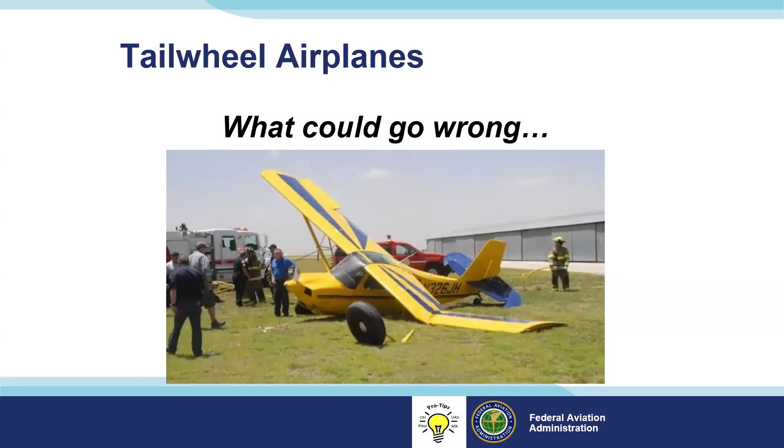So, okay, golden rules for tailwheel flying. Go ahead, Bob. And you can see right there, they're pretty simple. You have to use your feet as well as your hands, as well as your head. So use the rudder pedals.

In a tailwheel airplane, it wants to fly. It's at a good angle to fly. So you want to keep that stick back and keep the tail on the ground. And I come back to my favorite rules: keep it straight. Rule number 1, use the rudder pedals.

So this is something people don't think about too often, but where is the CG? Think about where the mains are located, and that'll give you a really good idea. If you're tracking straight, don't get too relaxed because you've got that big rudder back there. You've got the fuselage, and if the wind is not your friend that day, the only control you're going to have is via the rudder, because guess what? It's steering that little tail wheel. So stay with it. Don't let it get away from you. And if you're not straight, the CG wants to get ahead of the pivot point.

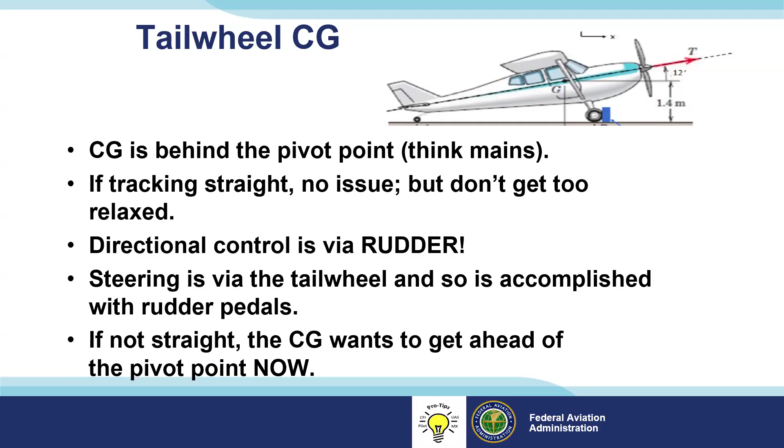Okay, so as Bob said, rule number 1 equals rule number 3: use the rudder. Here's a problem we run into frequently when individuals come here to get a tailwheel endorsement. This applies to anybody with 50 or 60 hours up through airline pilots with thousands of hours who come here to get a tailwheel endorsement.

Many of them have trained in aircraft where rudder usage is secondary to practically non-existent. The hardest thing we have to do is get them to wake their feet up and use the rudder pedals, to be able to feel and anticipate what the airplane is doing and what you need to do to correct it. We have one primary rule here: regardless of wind, you never stop flying a tailwheel airplane from the time the engine starts in front of the hangar until the engine stops in front of the hangar.

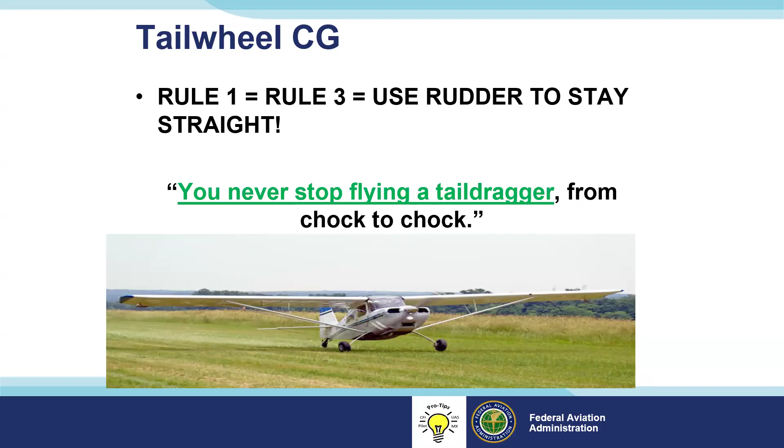So what about the brakes? We find this is a major problem, and as you can see, we teach it a little bit different. We only use the brakes for 3 primary functions: startup, run up, and possibly shutdown.

There is one other item. Sometimes on some of these airplanes, you do need to hit a little brake to break the tail wheel loose so you can make a tight turn. But overall, we want to keep your feet away from those brakes unless you're in one of those first 3 major points. When else might you need brakes? Well, a bad tail wheel.

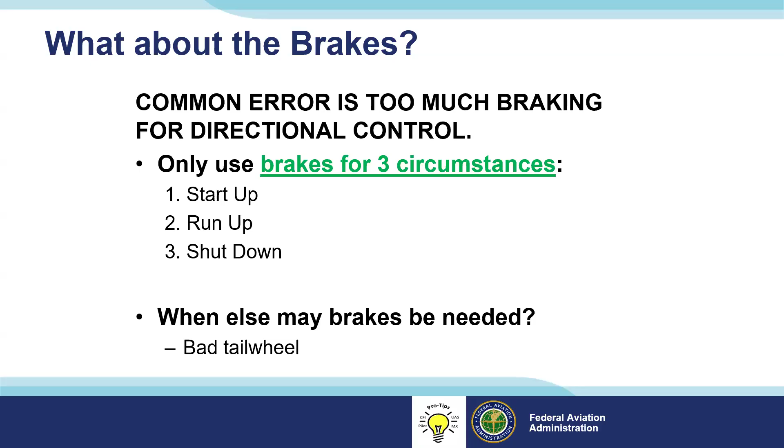The old style drum brakes, which we have on our Cubs here and the Champs, are pretty useless. The newer disc brakes are much superior as far as being able to slow that wheel from turning. So you have two problems: one, the old drum brake just doesn't want to work, and two, the newer disc brakes are just too good.

So once again, I go back to what I said originally: use the brakes for what they were intended, not to help you out. You've got the controls. Remember, stick back for best control and to avoid what's on that picture right there.

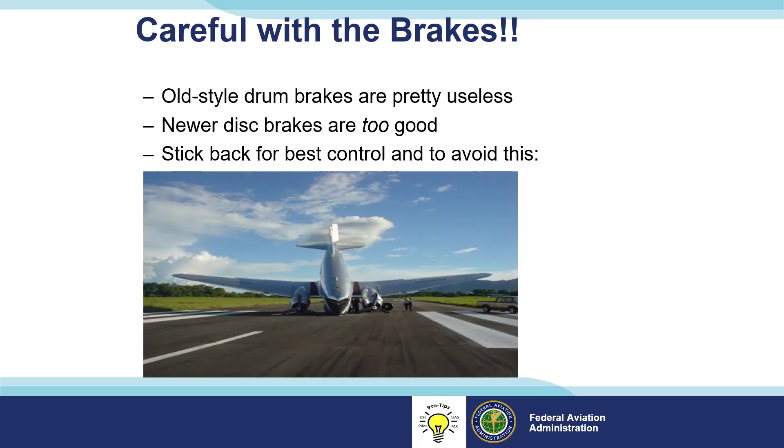One of the things I'd like to bring up is individuals that come to us, particularly if they've been flying tricycle gear airplanes up to this point. This reflects a lot on the instructors too - they've learned to taxi with about 2,000 RPMs and riding the brakes all the way to the runway. That doesn't work so good with a tailwheel airplane.

What we try to do here and insist on is that you need to be able to stay ahead of the airplane and feel the airplane so that you don't need brakes to get yourself out of trouble. Now that's a rule that doesn't always hold true.

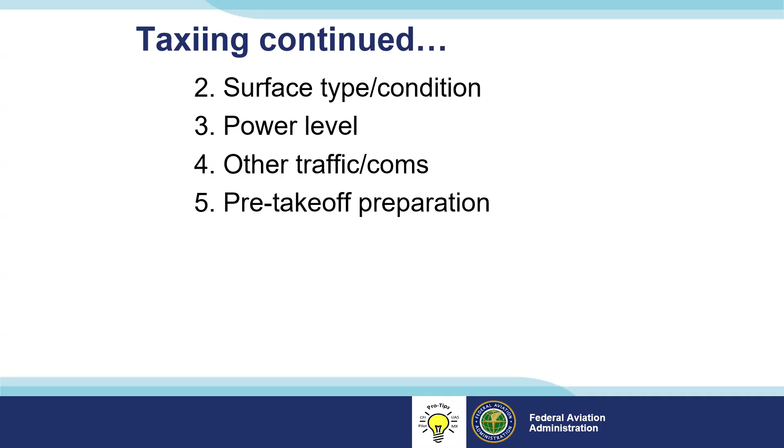Other takeoff factors we want to consider and teach are how to deal with the winds and the crosswinds, and what is the crosswind component for the airplane you're flying that day. On a 200-foot wide runway like we have, if you've got a good stiff crosswind, I'd like to teach a more advanced student that if you start on the very northeast corner of the runway and angle about 15 degrees to your right on a takeoff roll, you can lessen that crosswind component by sometimes 10 degrees and 10 knots, and be comfortably well within the crosswind limitations of your aircraft.

The other thing to consider is climb performance, and that's something we especially have had to deal with in the last 4 or 5 weeks - we've had unusually warm, humid weather, so aircraft performance is very important along with dealing with crosswinds. Maybe yesterday when it was 70 degrees, you were 200 feet above the water tower half a mile off the end of the runway. Today, with that crosswind and trying to keep it straight, and it's 91 degrees and 70% humidity, that water tower looks like it's getting real big in the windshield. So you need to take those kinds of things into consideration.

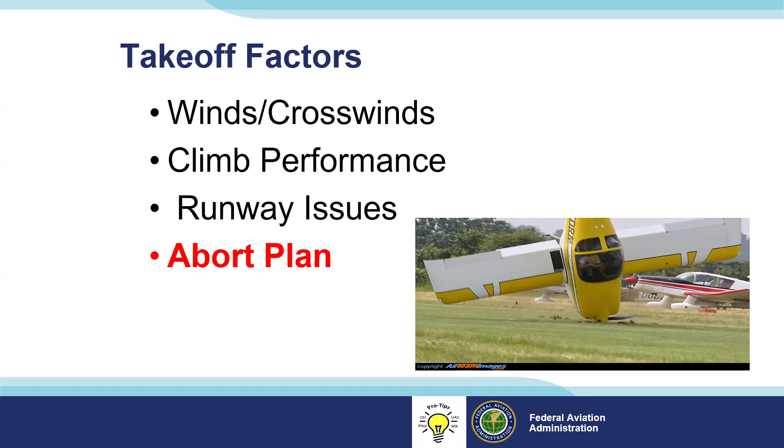Runway, as Bob mentioned earlier - are you taking off on hard surface? Is it a rough hard surface? Is it an old runway with lots of cracks and bumps in it, or a brand new resurfaced runway? Is it a turf runway, and if so, is it tall grass or short grass? Is it wet grass - are you operating off a turf runway that underwent a 2-inch rain at midnight the night before? So you want to take those things into consideration and have a plan to abort if needed.

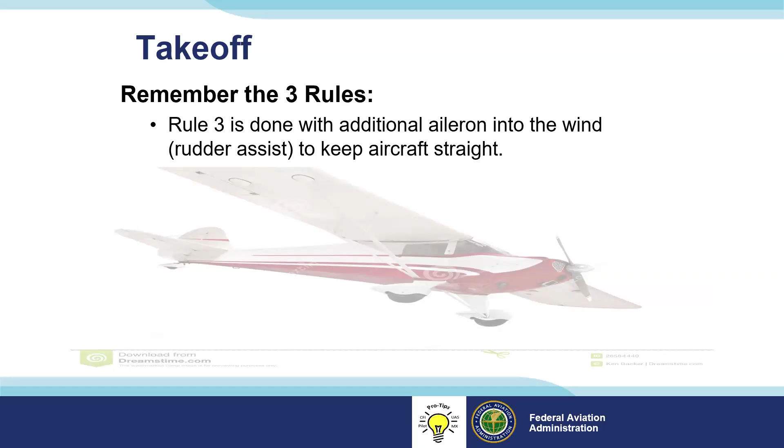So let's go back to our rules. The 3 rules were, and that could be a test, but in any case, this is the one we're looking at. Rule number 3: you want to keep it straight with the rudder, but you need to use additional aileron into whatever wind you might have out there to help keep that airplane straight. The wind comes up, or the wing comes up rather. You may not have enough rudder authority to stop it without doing that. And hence you might see some parts of the country you hadn't planned. So the 3 rules: keep it straight.

Okay, so here's what we like to do when we say we teach not only attitude flying, but develop a feel for the airplane you're flying.

All right, so we start with our step 1 on the takeoff. We start with the stick all the way back, and that's sometimes very hard for people to get used to. The reason being, from the time you add power until you're up to full power setting and have picked up some ground speed, your only directional control at that point is with that tiny little wheel in the back. So often I see people, when I start working with them, that have had a little bit of tailwheel time—the first thing they do is as fast as the power comes in, that stick comes forward.

Now, if you've got a crosswind, you're in about 5 seconds of no man's land there because the rudder is ineffective and that tail wheel is off the ground. So we see issues with that happening with some regularity.

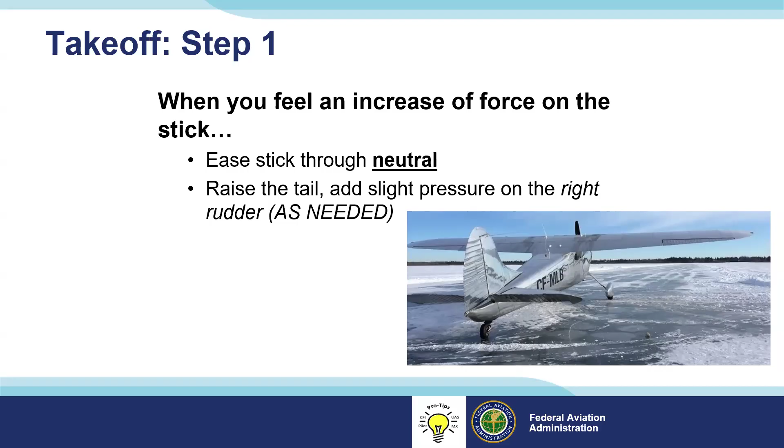So we start out with the stick all the way back, ease the power forward, and when you start to feel a little bit of a load on the elevator, you start to ease the stick forward to about the neutral position, not slamming it all the way forward. What we want to do is raise the tail, but raise the tail about a foot off of the ground, and that's all. Now you're in a very positive angle of attack, and you're using the rudder to keep it straight, and you continue to accelerate, and off we go.

That tail, with the tail low, you've got that positive angle of attack. So when that airplane is ready to fly, it flies. Don't bother to look at the airspeed indicator because that's inaccurate because of that angle anyway. So you feel the airplane, and it will treat you very well.

I want to add in on this particular point. We try to teach not a movement of the stick as much as a feel for the stick. Try to feel what you're doing with that airplane and let it try to talk back to you a little bit. We run into this all the time with people—when you tell them you've got to move the stick, well, it's either all or none. That doesn't work. And then if you tell them you've got to be a little bit more gentle with the stick, now they've gone the opposite way and it's too gentle and it's not accomplishing it. So really the only way you can do it is to feel the airplane.

It's what we teach here. It's called attitude flying, and it applies not only to your head, but to the airplane.

One mistake that individuals often make at this stage is because in a three-point attitude on most airplanes, you can't see over the nose. And a pilot, for some reason, they're used to sitting in a 172 and seeing over the nose. You get them in a tailwheel airplane and say, okay, you start out with stick back and ease it forward. The tail comes off, keep the tail low and keep it in that nice positive angle of attack and it'll fly right off. The first thing they want to do is push that stick forward so they can see over the nose. Now you're in a neutral, or in some cases with some airplanes, even a negative angle of attack.

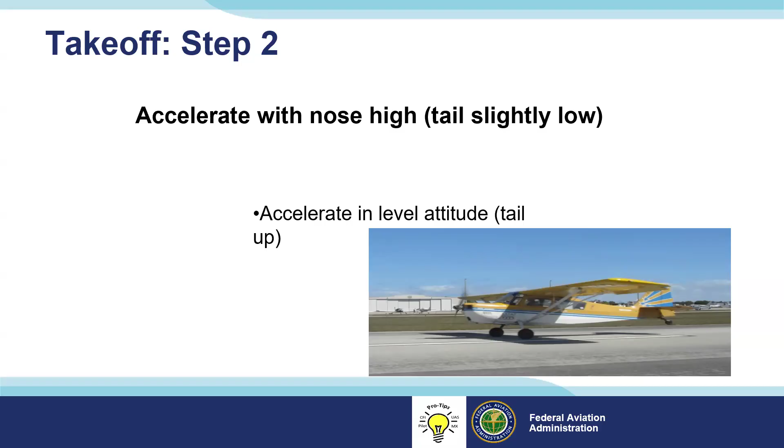And I'll tell them when we're taking off to the north here, if you're going to leave it in that attitude, we're going to be driving this thing on the ground all the way to Fond du Lac rather than flying. And Fond du Lac's 33 miles away. So you've got to do it smoothly and positively. It's very easy. Keep the tail low. The airplane will take care of itself and it'll fly when it's ready. You don't have to sit there and stare at a gauge or be herky-jerky on the stick.

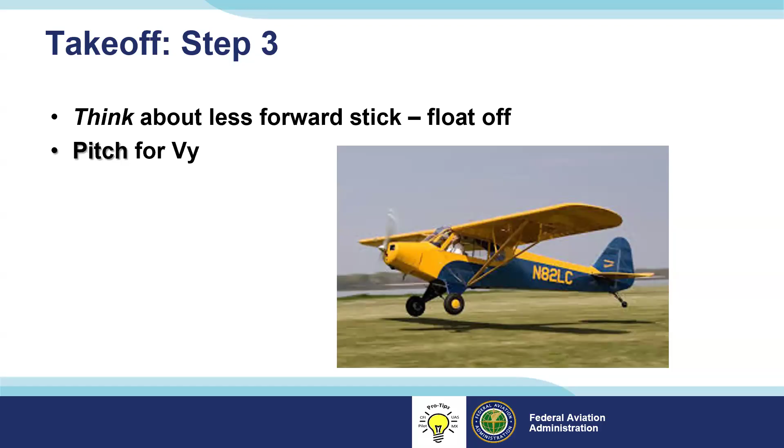I think Steve has covered that pretty well on this slide. Just think about moving the stick rather than physically pushing it an inch here or a quarter inch there. Just let the airplane do what it wants, and that's it. It wants to fly. Once you're off the ground, you can pitch up and get yourself in line with whatever comes next.

Everybody knows about P factor, but how many people think about if the airplane is on a three-point stance, what kind of P factor are we going to get when we put in that power? You're in a high angle of attack, which increases the P factor. Therefore, you're going to need to use that rudder. Again, what you need, no more and no less.

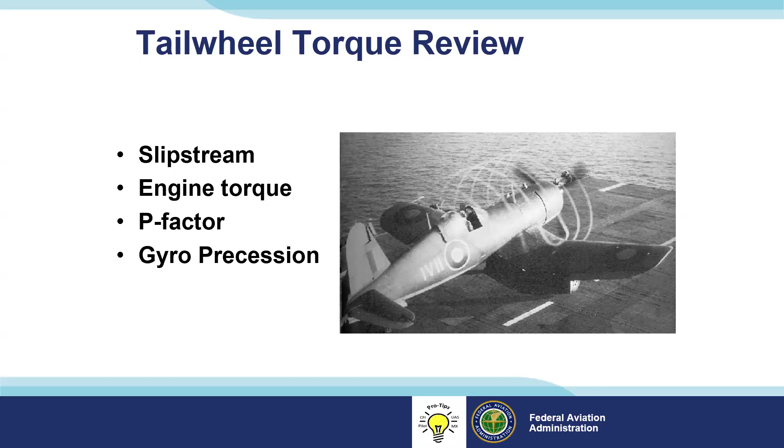Engine torque. The prop is turning to the right on American airplanes or American engines, and equal and opposite reaction. So there's another one. And then the gyroscopic precession. Yep, it applies to the airplane just as well as it does to the old gyro instruments.

Here's a little exercise that you can do, and it's one that we incorporate from time to time. It works very well. Take about a one-foot-long piece of yarn and tape it to the center lower spot on your windshield. If you are in a good coordinated flight attitude, that string will be nice and straight. If you're skidding or slipping or yawing, or in an uncoordinated setup, that string is going to tell you right away that you are not coordinated.

You don't see this very often on airplanes. You see it all the time on gliders, for those of you that may have had something to do with getting some glider time or what have you. They do it frequently there. But if you, as an instructor, have a student that's having a hard time feeling the airplane, this string idea will really help.

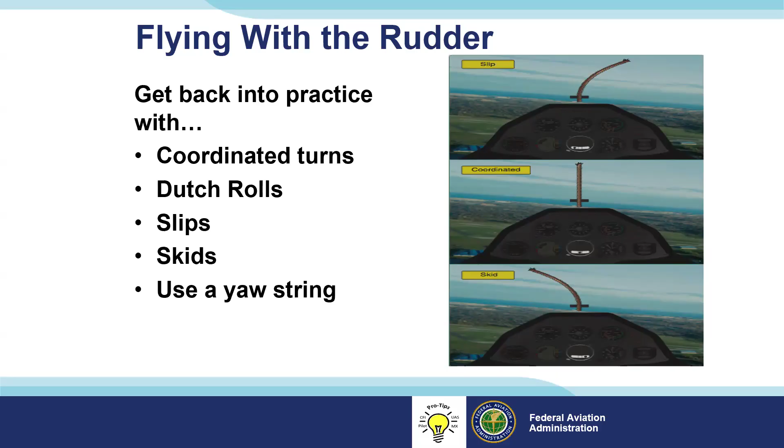The other thing that we really like to do to help a student develop a feel for the coordinated inputs of aileron and rudder is the maneuver called the Dutch roll. That is nothing more than rotating the airplane about the longitudinal axis, about a 20 to 30 degree bank left, followed by a 20 to 30 degree bank right, while keeping the nose pointed at an exact spot on the horizon.

This is one of my favorites, the stabilized approach. We're big on that because, especially with tailwheel, if it's not stabilized, the end result may not be what you're expecting. So what is a stabilized approach? You have to go back and ask yourself, what controls airspeed and what controls altitude? We call it pitch, power, and airspeed.

We teach a stable approach in that the basic airfoil is going to be in the best glide attitude. On these high wings, most high wing tailwheel aircraft, the bottom of the wing is going to be just about parallel to the horizon. That's going to give you a very close approximation of the best glide. Having said that, that leaves only the power left to maintain your altitude. So if you're a little bit low, you're going to add a little bit of power. If you're a little bit high, you're going to take a little bit of power off. This is going to go right back to the feel for the airplane and energy management.

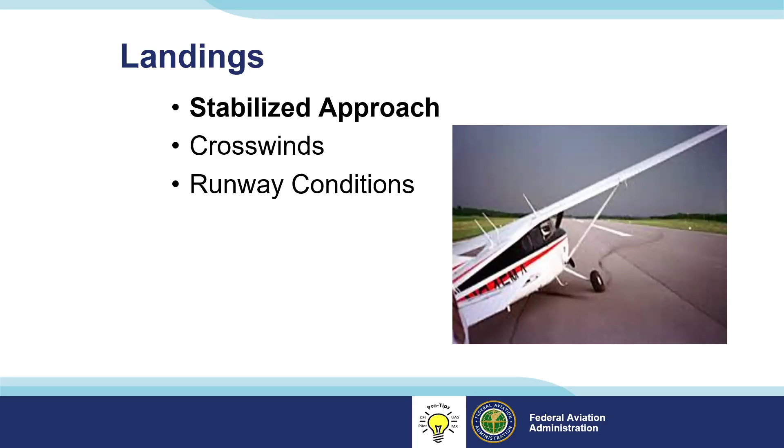So if you're in a crab or a slip approach, you're going to end up having to change it anyways. Here, with the crab approach, you only have to do it once.

Two types of landings that we do in teaching tailwheels: there's a 3-point or full stall landing, and then there's also the wheel landing.

In the 3-point landing, we teach the approach this way: you've been flying a 152 or 172, so think in terms of how you handle a soft field landing in a 172. We're going to come in with a stabilized approach, and then as you reach about that 10-foot point off the ground, you apply back pressure to level off and reduce that rate of descent. In a tailwheel airplane, you're going to make an eye transition and not be looking over the nose anymore, but about 30 degrees to the left and right.

Now you can sense the airplane starting to settle, and we want to play that game of trying to hold it off as long as we can. For every foot we go down, we want to add a little more back pressure and slow that rate of descent down, so that if you make the perfect 3-point landing, it would be a zero descent, zero flight speed. Once on the ground, this is where we run into big issues with tricycle gear people.

They're so used to, once on the ground, just letting go of the control stick or control column and letting it roll out. Well, that's where you get into big, big trouble in a tailwheel airplane. You keep that stick back. The reason for that is it keeps the air flowing over the elevator, which helps keep that tail on the ground. And now at that speed, those wings are in a stalled configuration.

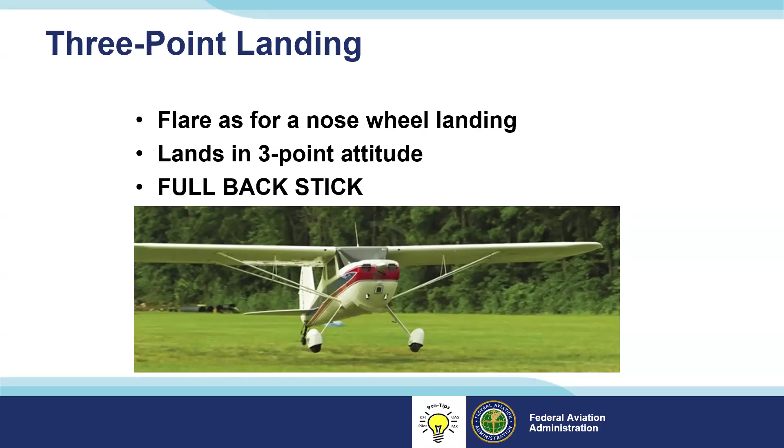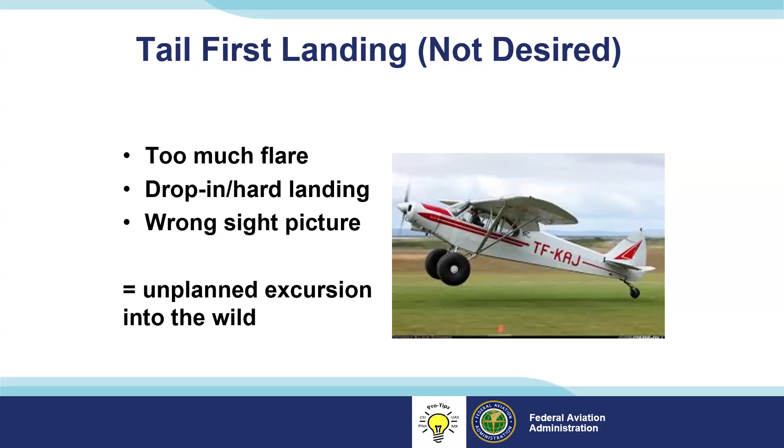Some of the mistakes we've seen here - when you tell students they have to level off and flare, they don't look off to the side. They try to keep looking over the nose. Once you've entered your flare, you've lost sight of the runway, and now you have no idea if you're 3 feet or 10 feet off the runway. That leads to dropping in or a very hard landing, all as a result of the wrong sight picture. And as it says at the bottom, this can sometimes lead to a very interesting ride through the tulies.

The wheel landing is just a little bit different because your attitude is going to be different. You're going to be just slightly faster than with the 3-point. You'll be in a low pass attitude, level or tail very slightly down. And you're going to use the throttle to control the descent, the stick for the speed.

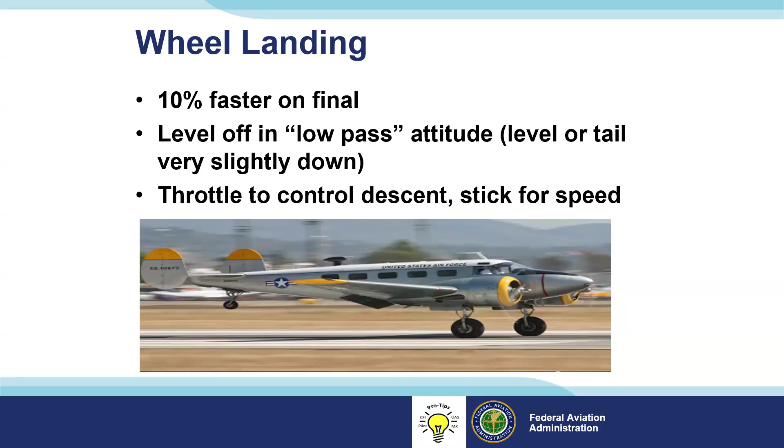So once the wheels touch down, you're going to think about a slight forward pressure. I will not tell you that you have to move the stick - I want you to think about it. Otherwise, the tail's liable to come down, that brings the nose up and increases the angle of attack, and guess what? You're up and moving again.

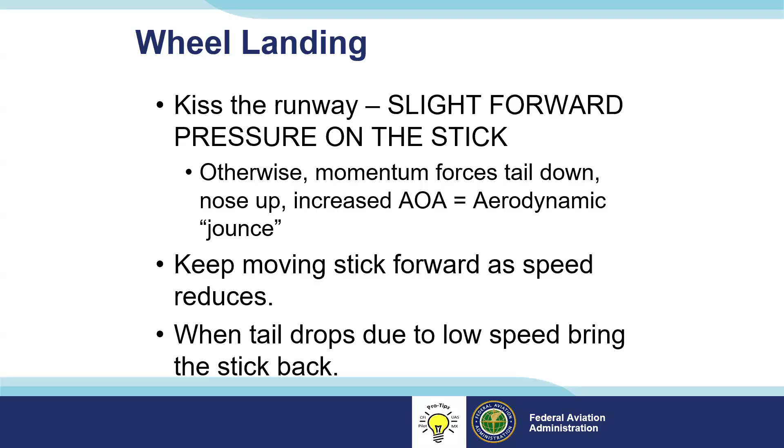As the airplane slows on the ground, you want to relax your pressure on that stick, just letting it go more toward a neutral position. When it finally gets to the point where that tail surface cannot keep the tail up, it's going to bring it down gently, and now you can work that stick back. This is a common error at that point in the wheel landing - they lose patience. Again, we're talking about feel. Fly the airplane, pressure that stick back, and you've got to end up with the stick all the way back to keep the tailwheel down.

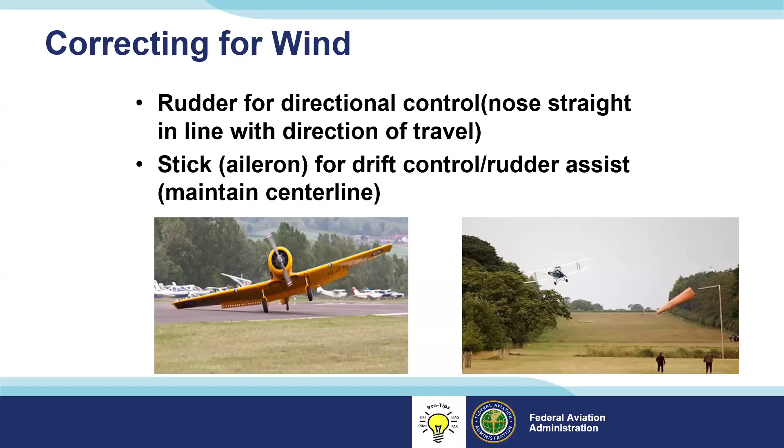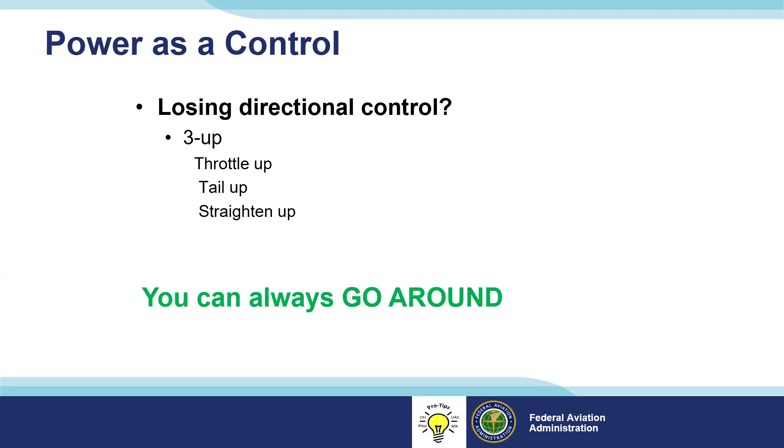So losing directional control - we like to teach what's listed there as the 3 up: throttle up, tail up, and straighten up. That puts you in a prime position to just go around. Once again, it's not necessarily physically moving the stick from one end to the other - it's pressure. Let the airplane tell you what it needs for what you want it to do.

Finally, some of the things we preach here: number one, to keep truly proficient, you can't be proficient if you only go out there and fly once every 4 to 6 weeks. We've discussed this among ourselves, whether it's Bob and myself who have flown thousands of hours, or individuals with only a couple hundred hours. I can tell it in myself - if I haven't been in an airplane for 3 or 4 weeks and I go out to fly, I can tell I'm a little bit rusty. What I like to do is go out and do some steep turns, a little slow flight, a couple stalls, and man, I've got it back again.

And the other thing is personal minimums. We teach that and work on it very hard here with students, but I'm concerned that many of you out there have forgotten all about personal minimums, and what are the conditions that are go and no-go for you, or what are you comfortable with? If you're only comfortable on Sunday mornings when the sun is up and it's dead calm, so be it. But maybe you need to find an instructor and practice a little on some crosswinds midday and expand those minimums a bit. It all depends on the type of flying you do. But I like to work with individuals to expand their minimums, not because they have to, but I always use this example.

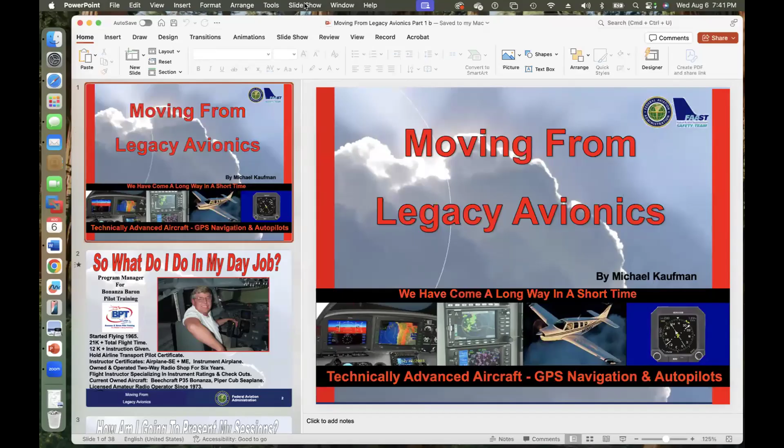Okay, very good. Bob and Steve, I was weaned in a tailwheel airplane and got about 7,500 hours in it. One of the biggest things about tailwheel airplanes is currency, currency, currency. My topic for this evening is moving from legacy avionics. It depends on when you were born as to what's legacy avionics—for me it's super homers and omnigators. That takes me back a while in the number of years I've been flying.

Moving on to the next slide, to give you an idea of what I do—I'm the program manager for the Bonanza Baron Pilot Training Program. I was an instructor with the program before becoming manager. The best part is getting the chance to fly with people. I started flying in '65, have over 21,000 hours, 12,000 in instruction, and over 7,000 in tailwheels. I have an airline transport pilot certificate and instructor ratings. I also owned and operated a two-way radio shop for 6 years for police and fire, so I'm kind of a geek when it comes to avionics. Right now I'm specializing in instrument ratings and checkouts. I have a P-35 Bonanza and a Piper Cub seaplane, and I'm also a ham radio operator.

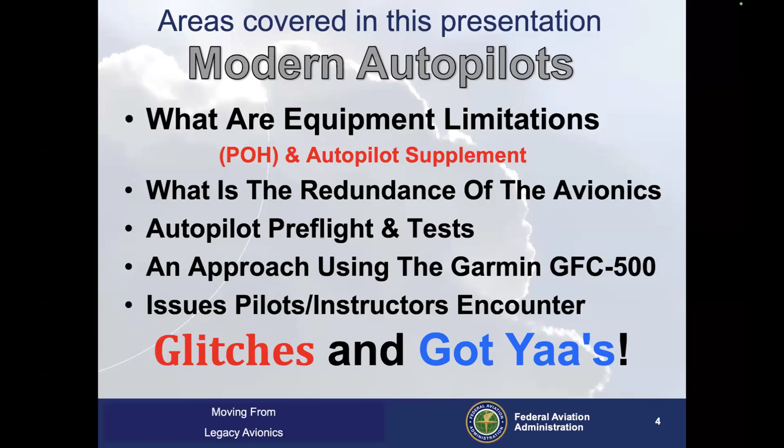We're also going to cover some issues that pilots and instructors encounter, and those are the items that I actually call the glitches and the gotchas. After the presentation is over, hopefully you can sort out the difference between a glitch and a gotcha.

Because of the time constraint here, I'm not going to be able to cover everything that I'd like to cover, so there's going to be some items I'm not going to be covering. One of them I'll mention is autopilot emergencies. I will touch a little bit on partial panel approaches. There's just so much to this modern avionics that there's just not going to be the time limit that we're trying to stay within.

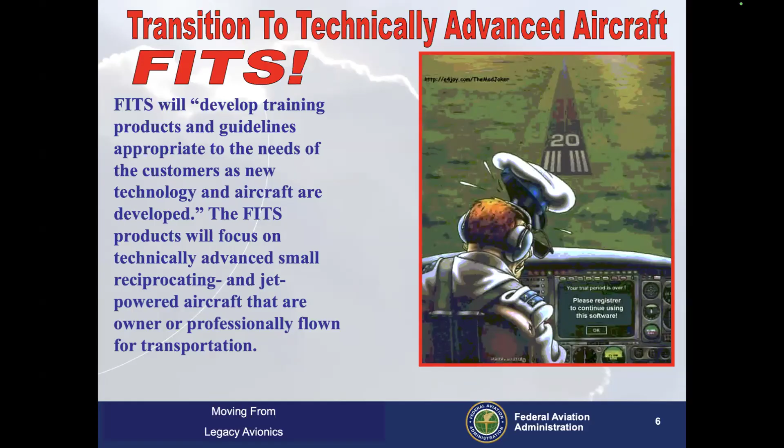Technically advanced airplanes—one of the things we're going to be using is the FITS training program, which is an industry program that works with the FAA and with pilots to go ahead and try to train others. One of the things you never want to see is your avionics letting you down just at the wrong time.

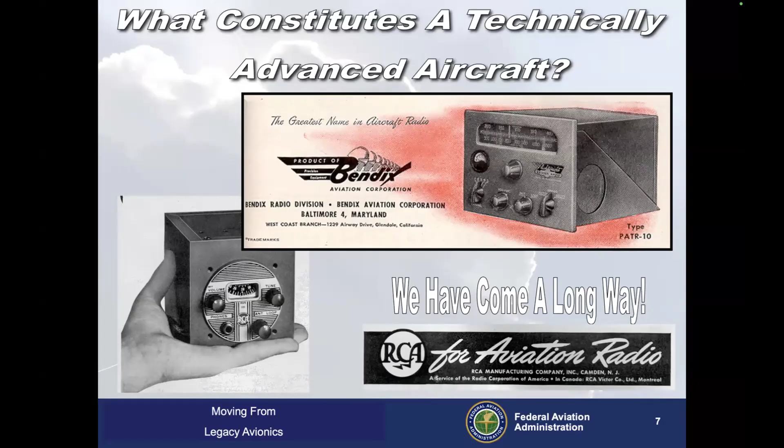Technically advanced aircraft, technically advanced avionics. This is a clip from a flying magazine in the 1940s. Early on, there was a corporation formed called ARINC. Prior to 1950, aircraft transmitted, received, and operated on frequencies between 3 and 6 megahertz—a whole lot different than the frequencies we're using today. Boy, yes, we have really come a long way—the technology that we need in order to go ahead and fly the airplanes.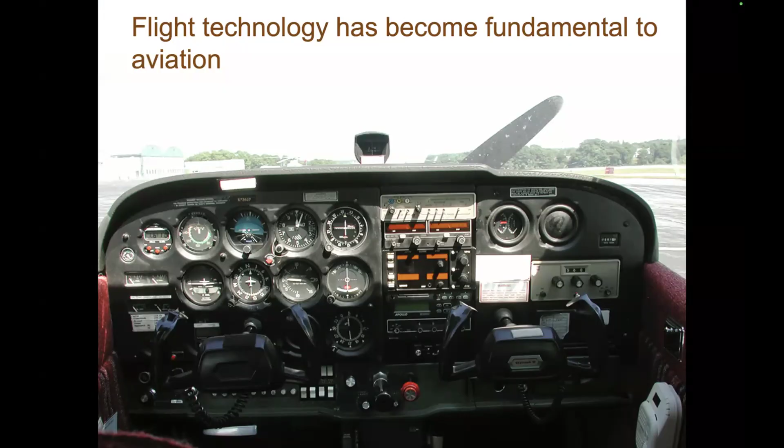You look at this type of panel, and for some of you, you probably look at this and say, hey, this is a fairly modern panel here. Of course, you look over at the right-hand side and you see that Cessna 480F in there, and you say, well, this panel has been around for a while, and a lot of people are doing panel upgrades. Then, of course, our panels come out looking something like this, hopefully—and also you're probably $100,000 poorer on your budget.

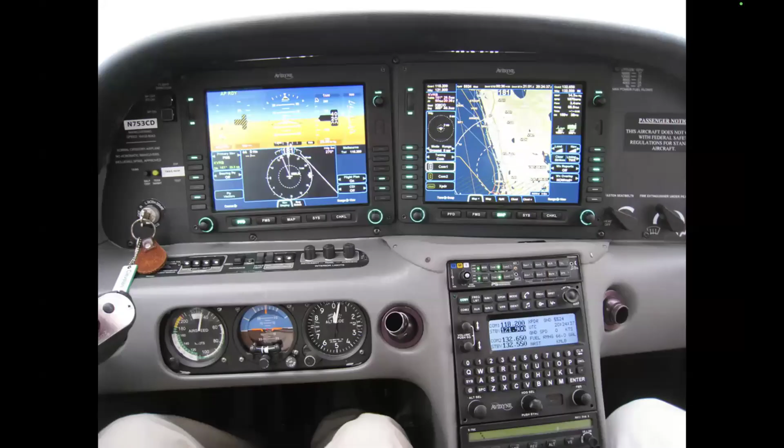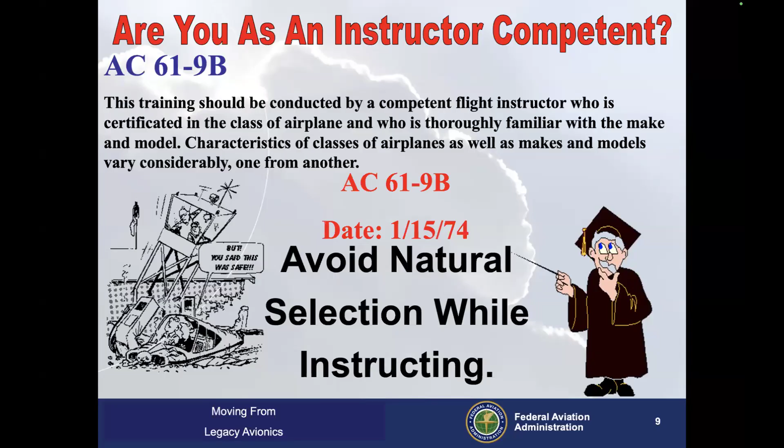I remember many cases there—by the way, you could have a Beech Bonanza that has 7 fuel tanks. So how do you get the fuel from the tank to the engine? Well, now we have to start going ahead and not being just competent on the airplane itself, but we also have to be competent on the avionics suite.

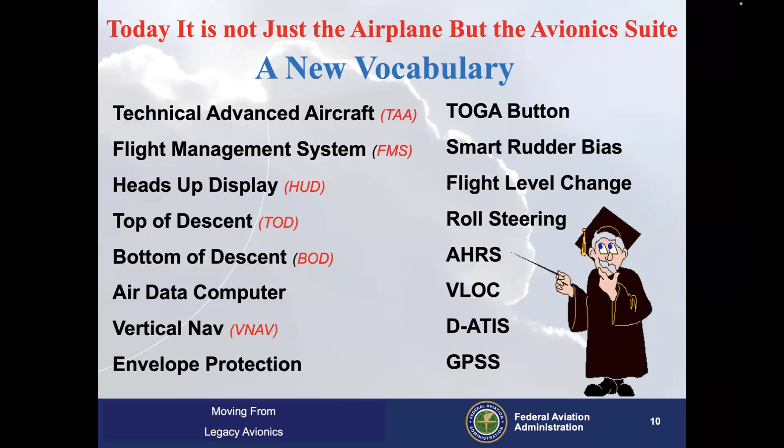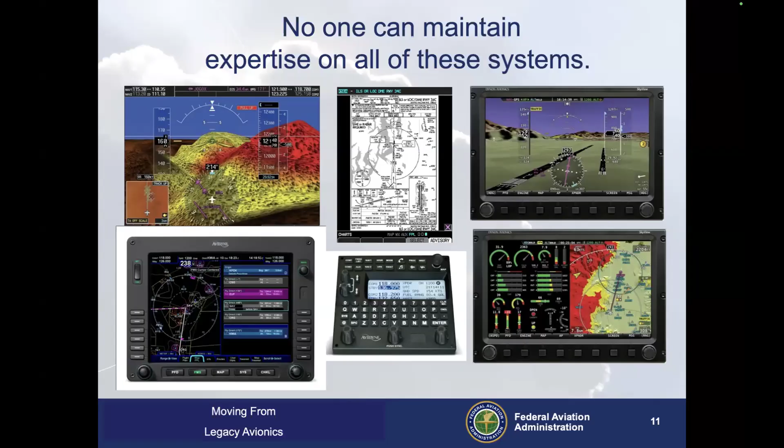Nobody can maintain expertise on all of these different systems that are out there. Everyone is a little bit different. Hopefully, in most cases, there's some standards that have been put together. I mentioned ARINC early on, and they actually have what they refer to as an ARINC bus, I think it's 429, which allows these different boxes here to go ahead and communicate with one another.

Connecting the practices that you know with the technology that you're going to encounter. This is really very important. Don't go ahead and give up on the things that you had been doing all these years. In other words, we use certain acronyms, we do certain things in certain places. For example, on glide slope intercept, we run through the GUMP checklist and make sure that we've got the landing gear down and the airplane is configured for landing. These are the same practices that you can continue on, whether you're using the new technology or dealing with some new equipment that you have in the airplane.

This is something really brought forward. The National Transportation Safety Board went ahead and said that our glass panel equipped airplanes are not safer than those equipped with the conventional steam gauges. They did an accident study, and the study was conducted from 2002 to 2006, when we first started seeing a lot of these changes in the avionics.

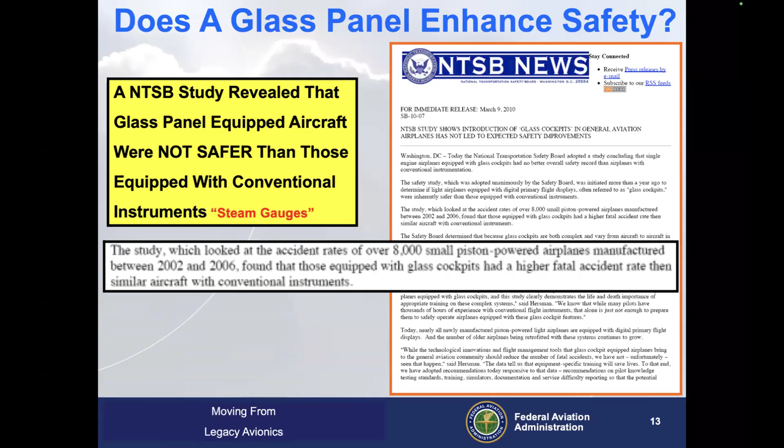There's some other things that they went ahead and suggested. They suggested pilots not familiar with the unique features of the glass cockpits were the leading cause of higher accident rates. This has really been true across the board, and there's several reasons for that. However, the purpose of this seminar is to go ahead and reduce airplane accidents. So this is what the safety board suggested: appropriate training on these complex systems is the only way that we can go ahead and make these glass cockpits safer.

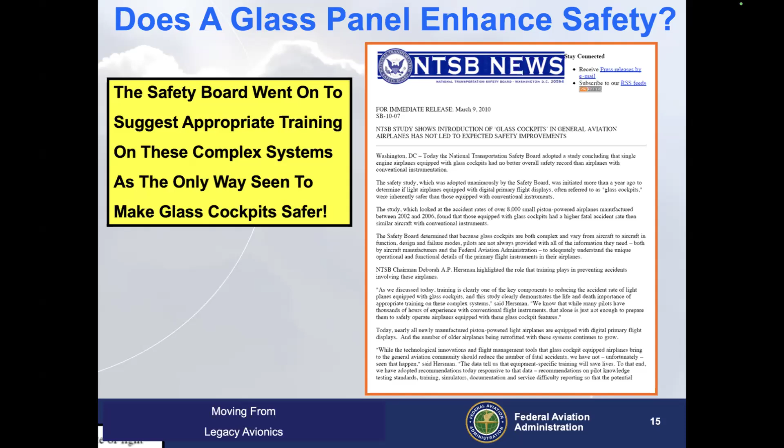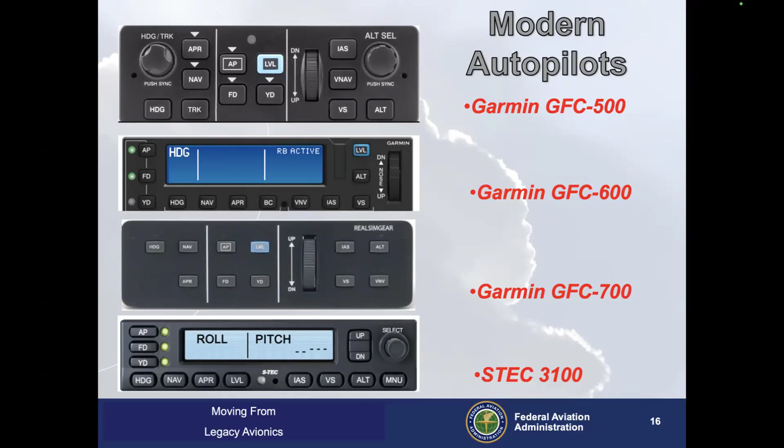Let's take a quick look here at some of the modern autopilots that we're starting to see on the market in our light aircraft. As I mentioned earlier in the presentation, my emphasis is going to be on the Garmin GFC 500. So there are some differences, and we'll go ahead and talk about them. You'll also notice the one down at the bottom there is not a Garmin product. It's the S-TEC 3100. I've had very little experience with it, but I have to say I do like it. It's a pretty nice box.

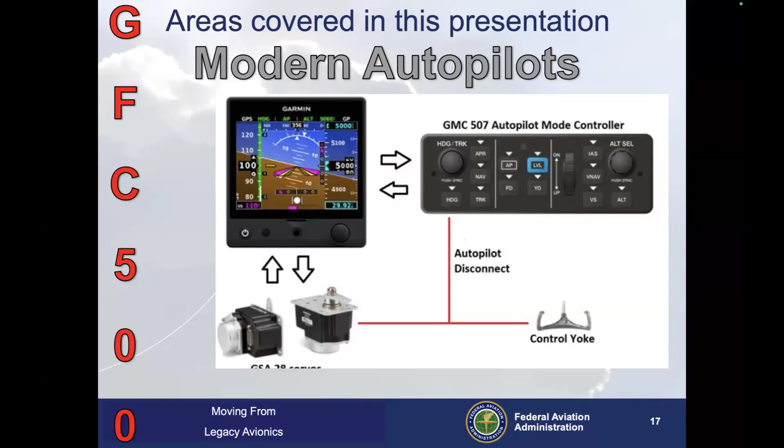Now, a lot of times when pilots are upgrading their airplane, and I'm seeing all these $100,000 panels that are out there, people are going ahead and putting them in. They get them on in there, and then they don't know how to go ahead and use them. You can go ahead and go through the manuals, we're going to talk a little bit about that farther on, and you can also go ahead and watch videos like the one that we had shown previously from Sporty's Pilot Shop.

So these are just a few of the navigators that we're going ahead and interfacing with the 500 autopilot. The one up there in the upper left-hand corner, that's the one that I have in my aircraft right there. You'll probably see some of the boxes up there if you recognize them, and now they're becoming what you call legacy, depending on what you look at as legacy avionics. But you've got the Garmin 430 and 530.

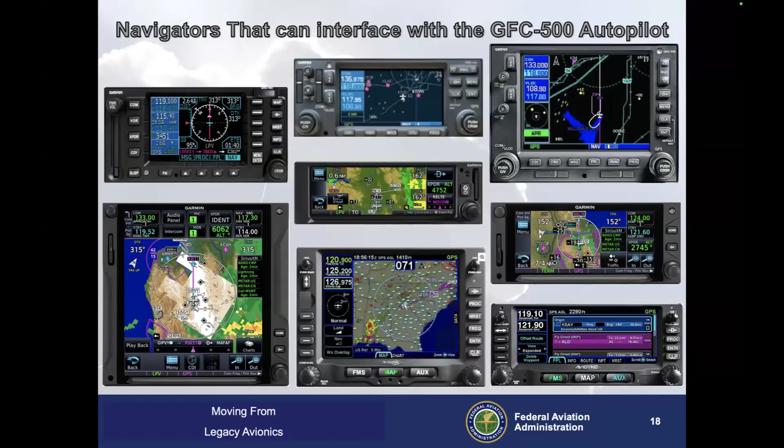And according to Garmin, those are now end of life. To go along with the navigators themselves, we have the displays, the glass displays. I want to point out particular attention to the upper center one right there. You'll notice here we have a glass display, and that glass display is configured with steam gauges.

As a flight instructor, and I've had this happen on numerous occasions, before you can go ahead and do all the button pushing, if you're doing an instrument rating with me, what you have to do is prove that you can actually fly the airplane on instruments. We get pilots that just had these upgraded avionics and they're used to steam gauges. Now we've got some glass that we're working with, and they cannot hold their altitude plus or minus 500 feet. It is amazing to just watch this.

Now, one particular gentleman, he was a little bit better than some. He was plus or minus 300 feet. Did you know that you can take these glass displays and put them in a configuration of steam gauges? By doing this on several occasions, that pilot, on the very next flight, who couldn't hold 300 feet altitude plus or minus, was now holding it within 50 feet after I switched the panel over to the steam gauges. It tells you in the manual how you can go about doing that. So that's something very, very important that we need to point out.

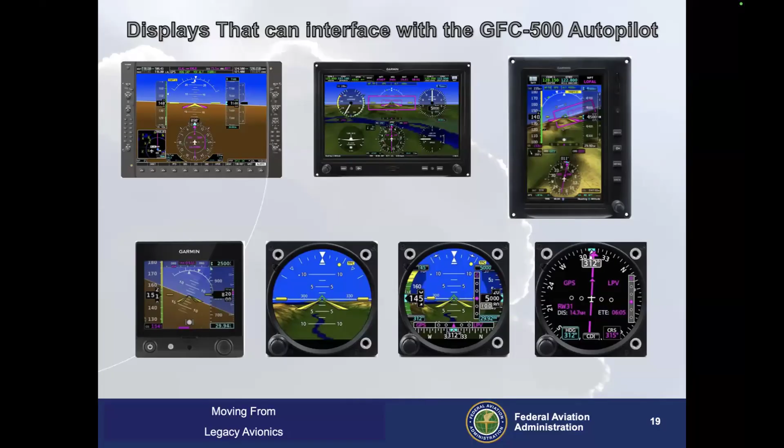You're going to take somebody, they're going in for a flight test. And the things that the pilot examiner is going to ask them: what do you know about the autopilot supplement?

So this is an example. I took some pages out of a customer's autopilot supplement, who recently did his instrument rating with me. You'll notice in the supplement they go ahead and tell you how things are interfaced and what particular devices are connected to that. I'm going to show you several pages of it, and there's going to be a few things in here that are going to be very surprising to you.

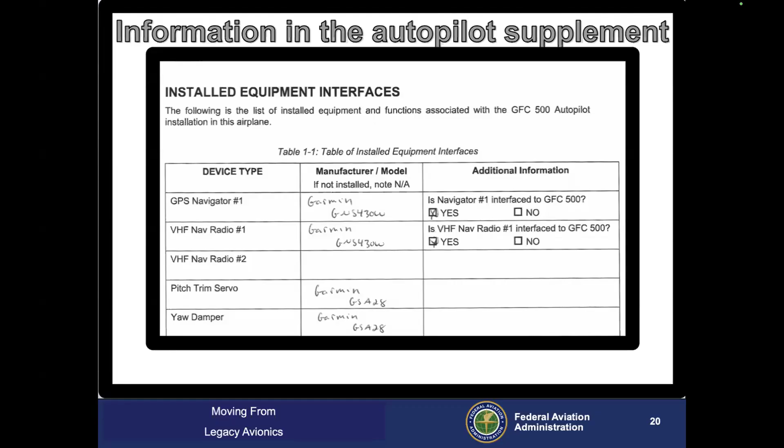Okay, so now here they've gone ahead and checked what modes of the autopilot, and this is for a G5, a GFC 500 autopilot. It shows what modes that autopilot is capable of flying. Now, in this particular case, this autopilot was hooked to a Garmin 430, and you'll notice they have all of the functions that are on in there. One of them, of course, being a yaw damper. Sometimes that's an optional thing. It really is a great add-on on the 500 autopilot.

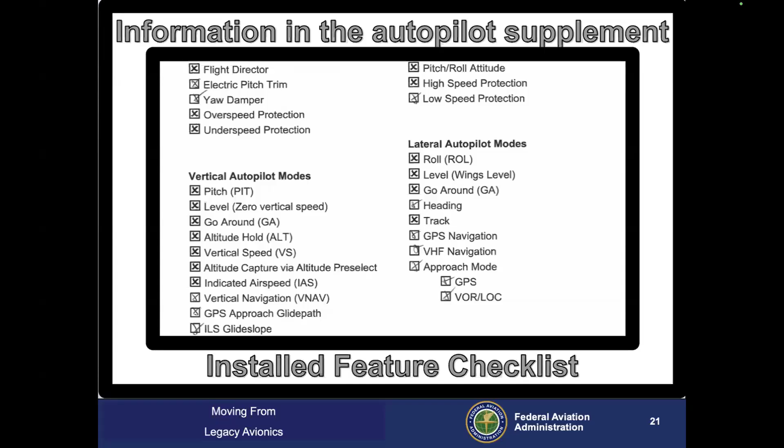Okay, limitations. Oh my goodness, we have limitations. So if you went ahead and bought a brand new Cessna 182 and it has, we'll say, a G1000 avionics suite in it, and you bought a Beechcraft with the same G1000 avionics suite in it, they are not necessarily going to perform the same. This was an interesting thing you need to be aware of so you don't get yourself into one of these situations where you get in trouble. It's actually the manufacturer of the airplane that sets up the parameters of the autopilots, and then, of course, the manufacturer of the autopilot programs it to a particular software version.

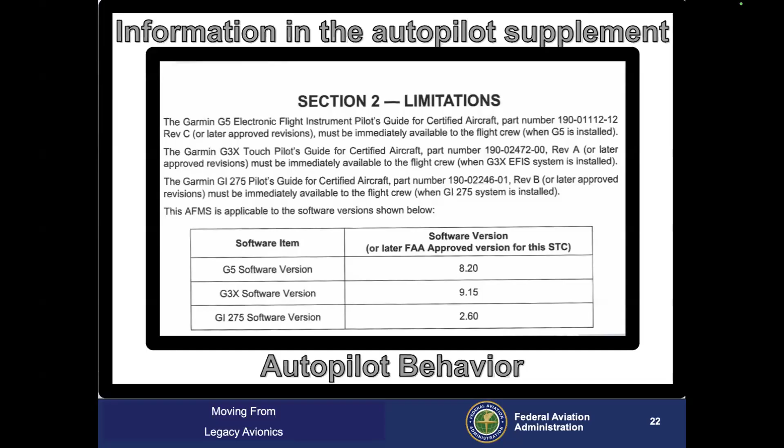Now, here we have a situation where there are different boxes that can be connected to this particular GFC 500 autopilot, and then it shows what software version is approved. That version or later is FAA approved, depending on whether you're running a G5, a G3X, or a 275 as a controller. The other item, we'll get to that in just a moment, but let's take a look at the requirements here for the autopilot.

For the GFC 500 autopilot, first of all, it says in the supplement that a pilot must be seated in the left pilot seat with a seatbelt fastened during all autopilot operations. That's something I guess we'd maybe take for granted, but I guess that means you can't fly it from the right seat.

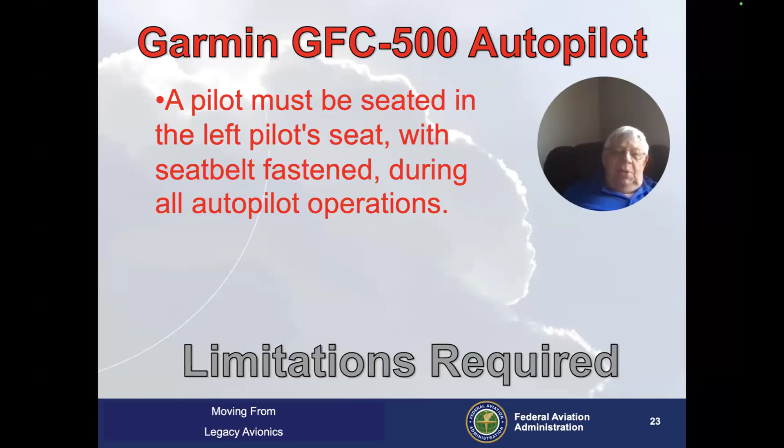Do not use the autopilot or yaw damper during takeoff or landing. And we'll get into, there's a little bit of a glitch there that we have. I shouldn't say a glitch — I'm going to call that one a gotcha that we'll look at a little bit later on.

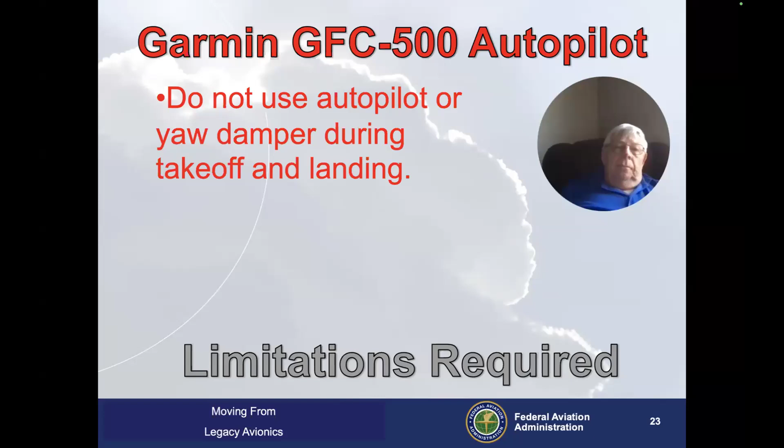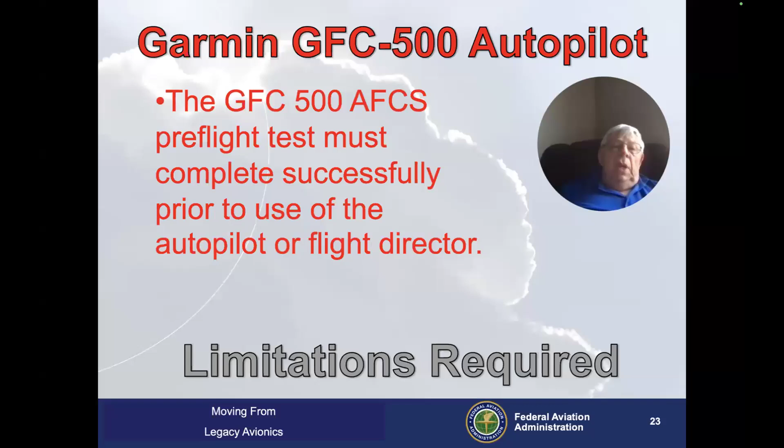GFC pre-flight tests must be completed prior to the use of the autopilot or flight director. On the GFC 500, when you turn the avionics on, it goes through the test automatically and gives you acknowledgement that the test has been completed. On my airplane, I have a switch I have to flip to the test position.

The autopilot must be disengaged below 200 feet AGL during approach operations. This one here kind of blew me away. The autopilot must be disengaged below 800 feet above ground level for all operations other than approaches.

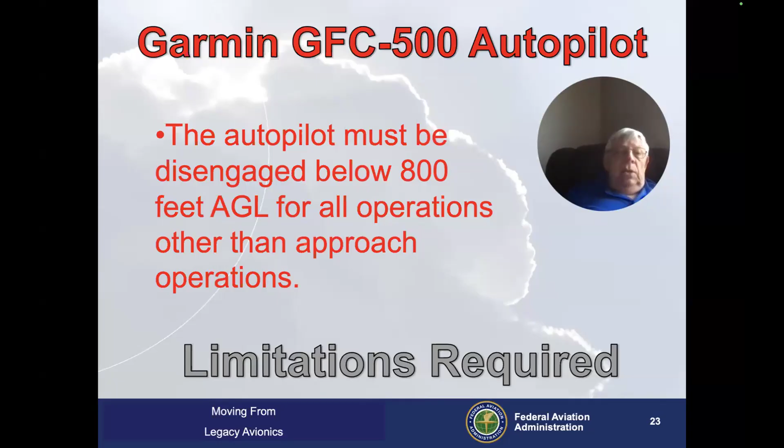A common thing a lot of people will go ahead and do, and I guess I've been a victim of that, is before I take off, I hit the TOGA button and set the pitch attitude, and everything is ready for the departure before I take off on the runway. I usually do that on the runway. Shortly after takeoff, everything looks good, and I may engage the autopilot. But it says right here, you do not engage the autopilot below 800 feet unless you're on an approach. It also says the GFC 500 is approved for category 1 precision and non-precision approaches only.

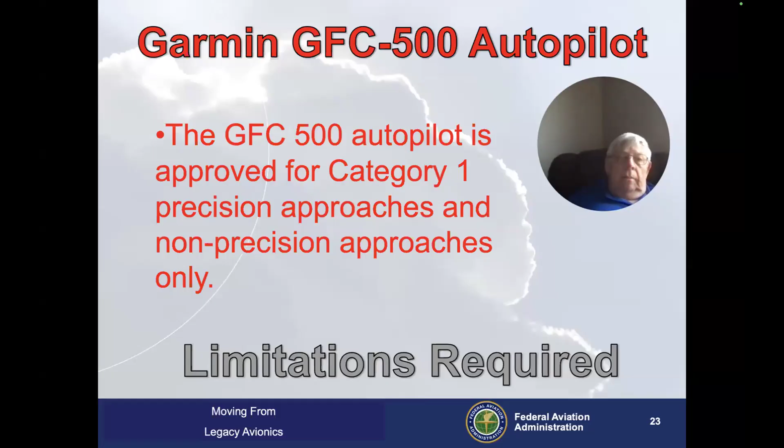AHRS - this is another important thing we want to talk about on the GFC 500 autopilot. The autopilot does not have an AHRS built into it. It must get it from somewhere else, maybe a G5 or a 275 from Garmin, or maybe a G3X or something like that. In a lot of cases, when we went through that supplement, we saw that certain things were engaged with the autopilot, so in some cases we have two AHRS.

Also on the flight test, this is in the ACS, the pilot examiner may ask you to demonstrate a partial panel. Well, what is a partial panel for an airplane that is equipped with so much redundancy? It kind of depends on the airplane. The whole idea is to put in a failure mode that is realistic to a situation that may occur in the real world.

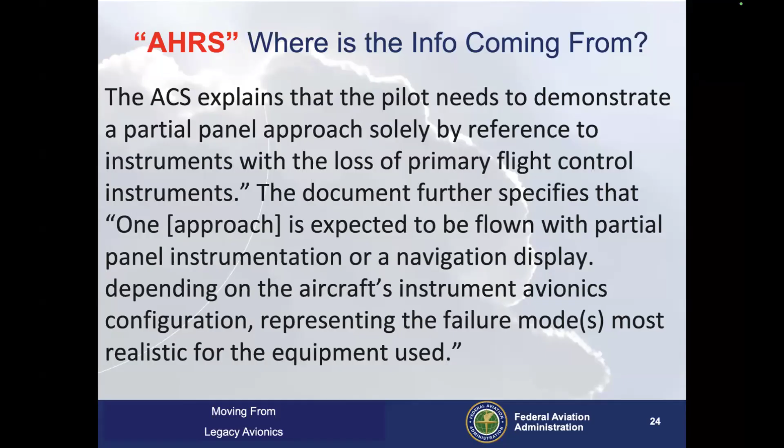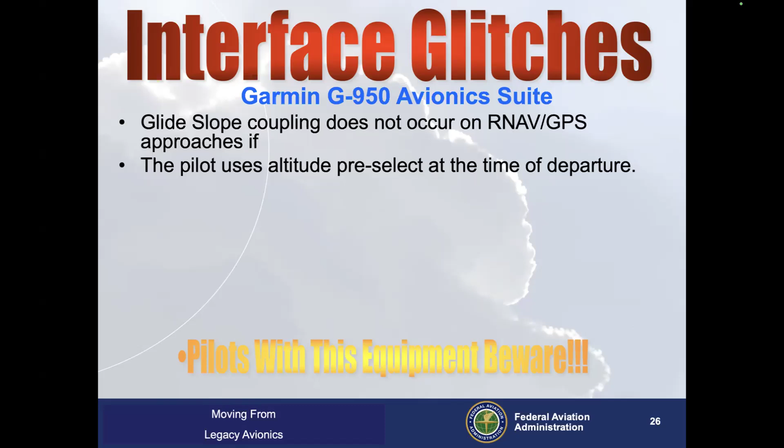Here's another one, kind of an unusual one. Glide slope coupling does not occur during RNAV and GPS approaches if - and by the way, this is with the Garmin G950 avionics suite - the pilot uses altitude pre-select at the time of departure and continues the entire flight, never turning off altitude pre-select. Upon reaching glide slope intercept, no glide slope intercept will occur on the autopilot. If the pilot disconnected the altitude hold at any time during that flight, it will couple to the glide slope. So this is one of those things the pilot needs to be aware of.

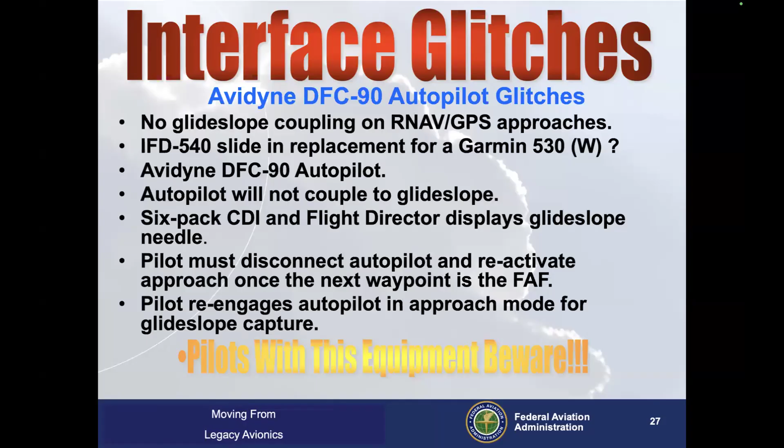This one happened with the Avidyne DFC autopilot and one of their glitches - no glide slope coupling. We weren't sure on this, but they had an interface where if you bought an Avidyne IFD 540, it was a direct replacement for the Garmin 530W, or possibly a straight 530. In this situation, the autopilot would not couple. With the 6-pack instruments, CDI, and a flight director with glide slope needle, the pilot must disconnect the autopilot, reactivate the approach once the next waypoint becomes the final approach fix, then re-engage the autopilot in approach mode, and then the glide slope will couple.

Okay, let's look at a quick situation. Now we've got a couple of gotchas here. Let's do an ILS approach with the 500 autopilot.

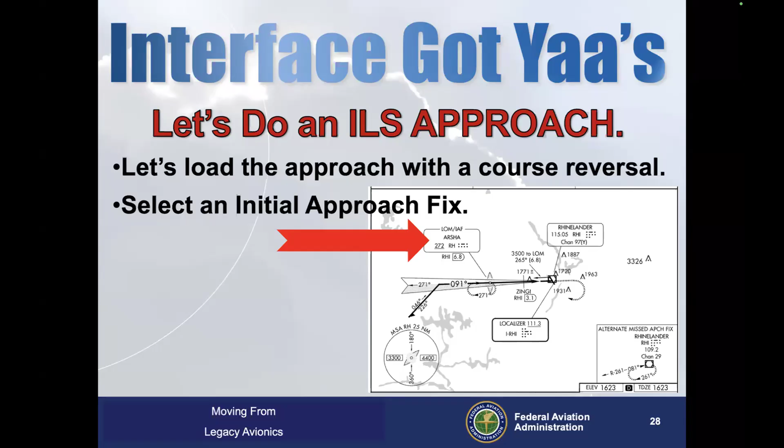We're going to load the approach right here with a course reversal. Here is the initial approach fix. We had the approach pulled up for Rhinelander, and Arsha is the initial approach fix. So we're going to do a procedure turn right here in this particular case. We activate the approach, and the autopilot is on in approach mode.

Altitude pre-select to the missed approach altitude - this is one of the things I always go ahead and do, I put that missed approach altitude in the window when I'm going to do an approach. It eliminates having to do one extra step later, and I use another device or function to tell me when I get to my decision altitude. So in this particular case, what is that altitude? We put in 3,500. That's in the altitude pre-select, and that's for the missed approach.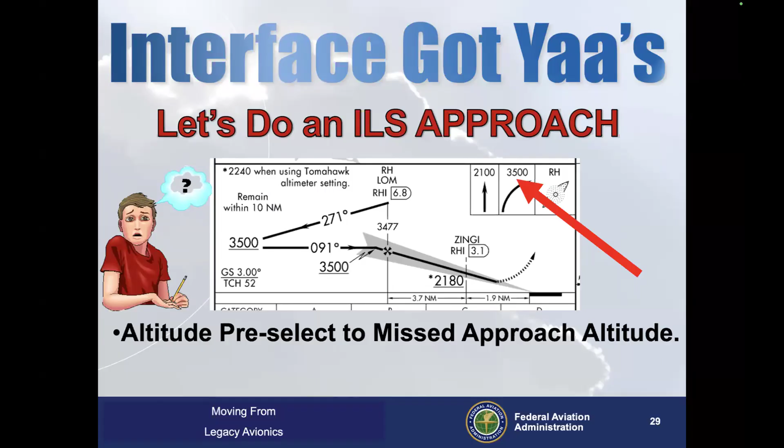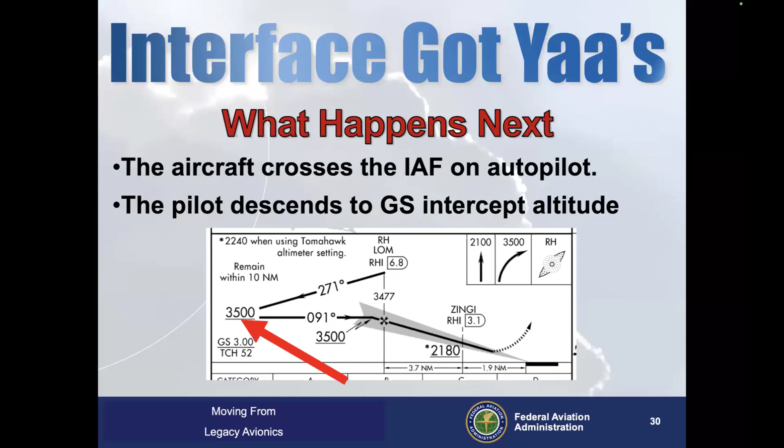What happens next? The aircraft crosses the initial approach fix on the autopilot. The pilot needs to descend to the glide slope intercept altitude - there, we've got it right there at 3,500 feet. The aircraft flies outbound for about a minute, does the outbound procedure turn, then the inbound procedure turn. And guess what happens next? Well, it depends.

The aircraft intercepts the localizer and turns in - that's what we wanted it to go ahead and do.

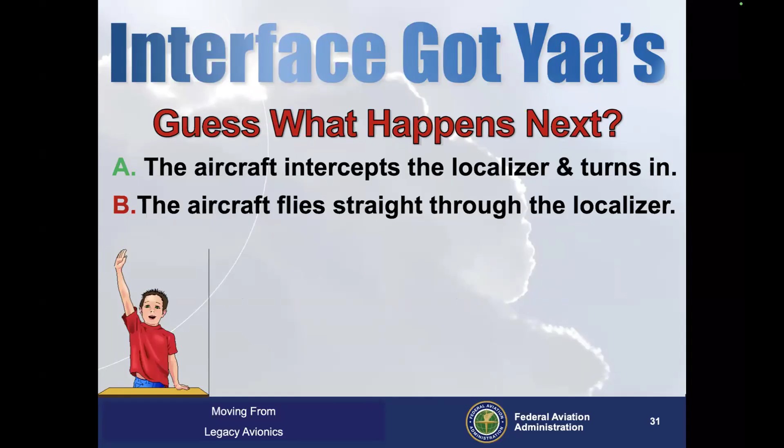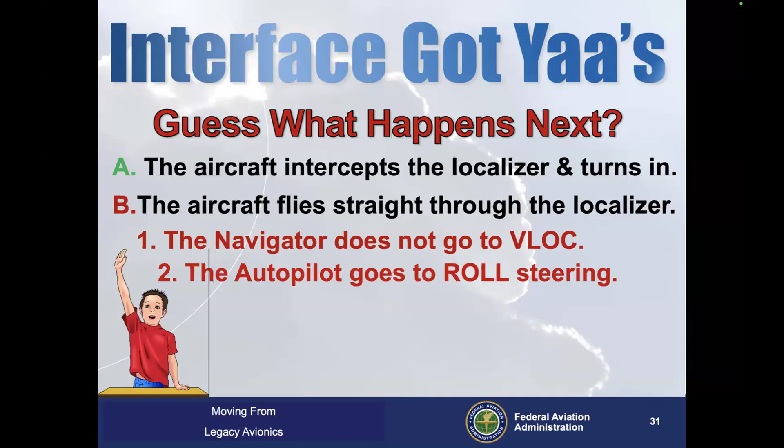Okay, the aircraft flies straight through the localizer, and we see that happen. The navigator does not go from GPS to VLOC, and the pilot has the option of setting his navigator to do that automatically. The autopilot goes into roll steering - I see this quite often. So here we are: the autopilot did not capture the localizer when it turned inbound. And number 3, it could be both 1 and 2 of the above.

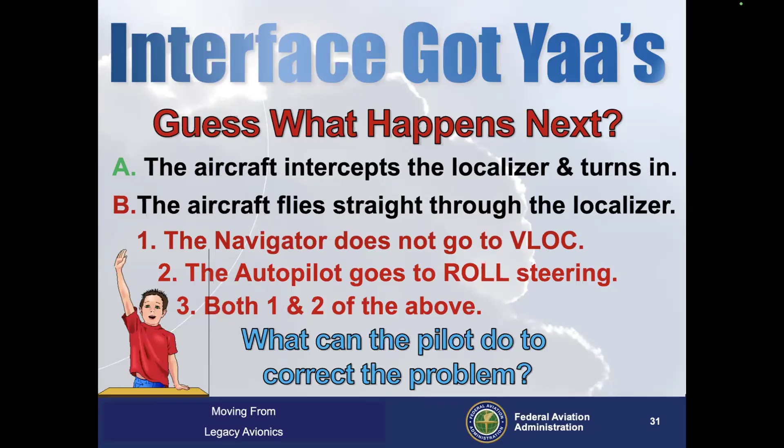What can the pilot do to correct that problem? I hope we know how to hand fly the airplane, and sometimes we just have to disconnect the autopilot and take over and fly it manually.

The aircraft continues inbound to the final approach fix. The glide slope needle comes alive and centers - that's a good thing. The altitude light on the GFC 500 goes out, and the GFC 500 autopilot captures the glide slope - that's a good thing.

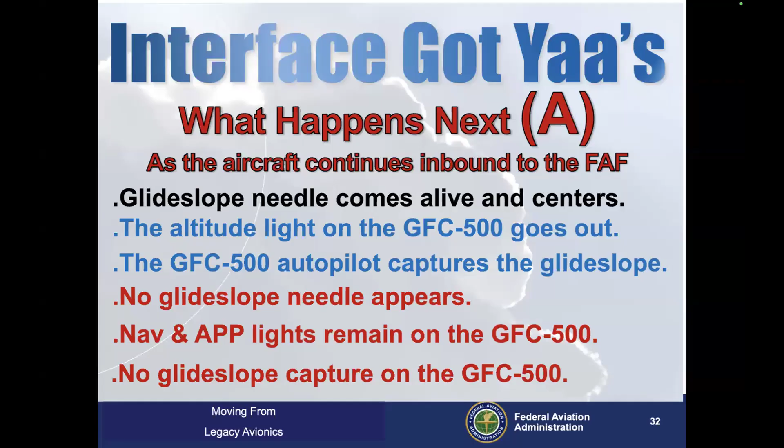No glide slope needle appeared. Nav and approach lights remain on the GFC 500 autopilot. I wrote an article in Midwest Flyer magazine about this about 3 months ago. There's a sensor in there that senses this. In this particular case, what it was is the localizer was working, but the glide slope was out of service, and that's how the box treated it - so of course, no glide slope capture on the 500.

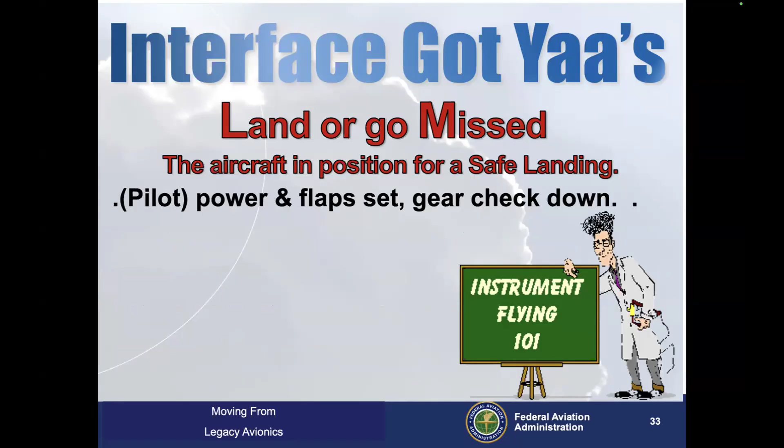Land or go missed - the aircraft is in position for a safe landing. Okay, power and flap set, gear check down. We should have gotten that at the glide slope intercept, but that's a good place to check and make sure the gear is down. Autopilot is off - check the light. 200 feet, remember, from the requirements for that particular autopilot.

Here's where we run into a situation: it may not turn off the yaw damper when you turn off the autopilot. So check to make sure that the yaw damper light is off.

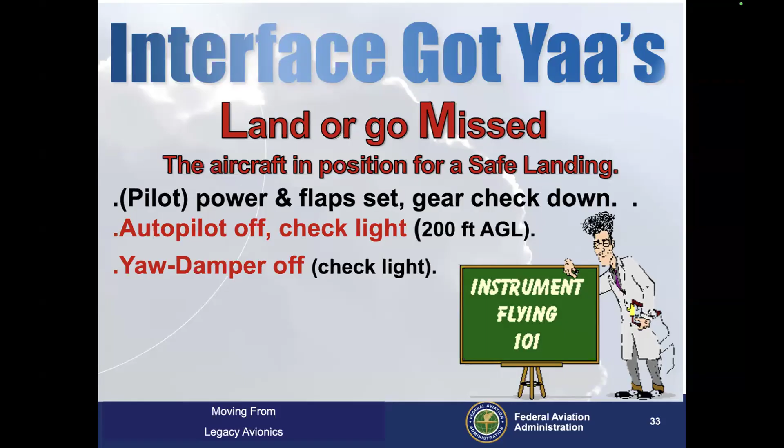Okay, now we're going to take a look at the missed approach. This is my take on that. Okay, the pilot: power up, pitch up, positive rate, gear up.

What happens? Look at the altitude there that shows where to climb to. Climb to 2,100 feet, then a climbing right turn to 3,500 feet direct to the NDB there. We'll love those NDBs. And hold.

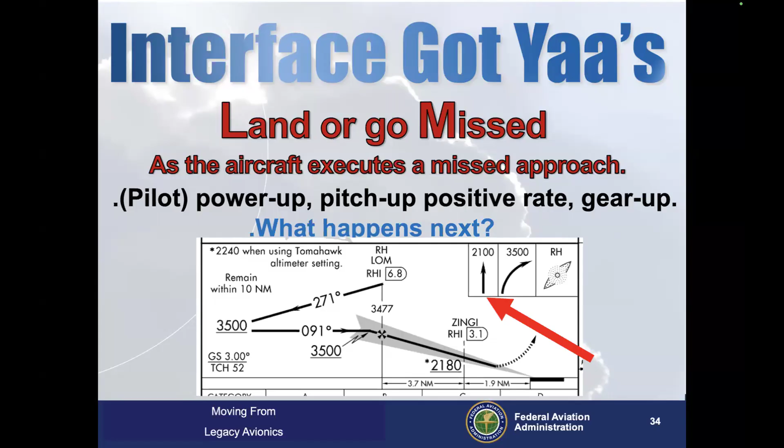Okay, so this is basically what we're going to do. Now with the 500 autopilot, things happen differently than what you're used to with a lot of other situations. First of all, these are some of the things that can happen.

Okay, the pilot does nothing. On my airplane, the box automatically switches and it automatically goes from the LPV to the GPS mode. The autopilot goes ahead and maintains what it's on. I did all the right things, and it automatically senses that the airplane did not land, and automatically covers me.

To the missed approach. Now, we can have something else that could possibly happen there, depending on what you have. The pilot pushes the TOGA button. If you have a TOGA—and by the way, that stands for takeoff or go around, new technology that we've been hearing here recently.

So you go ahead and you push that button, and what that will do then on the autopilot is take the flight director and pitch it on up for you. And in a lot of cases, it switches the autopilot to the roll mode. So that's one of the other items that comes up.

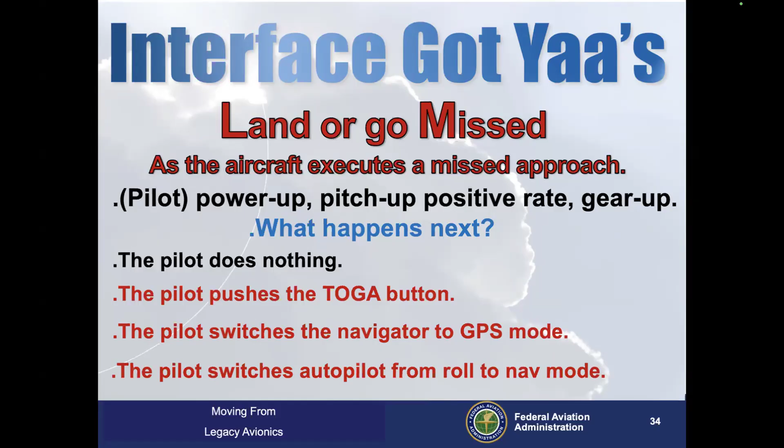But the pilot should make sure that if he didn't, he switches the navigator to the GPS mode for the missed approach. And again, the pilot switches the autopilot from roll to the nav mode. So it all depends on what equipment you have in the airplane as to how you're going to go ahead and treat each one of those.

Okay, I don't think we're going to have any time for questions and comments. Looking at the time here, I've already run over. But again, I want to thank everybody, make some comments on some of the things you have possibly seen, and a couple other things here—some of my comments for safety, things to remember, the last items for flying a technically advanced airplane.

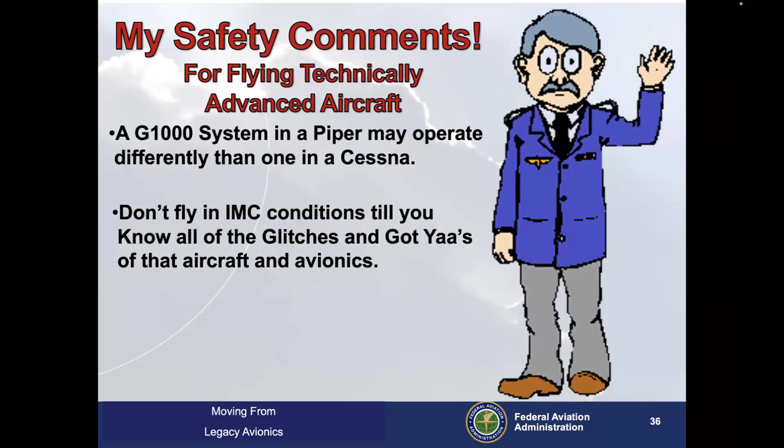Number one, a G1000 system in a Piper is not the same as a G1000 system in a Cessna. Remember that, remember that, remember that. Here's another one: don't fly in IMC conditions till you know all the glitches and gotchas of the exact airplane and avionics you're going ahead and flying.

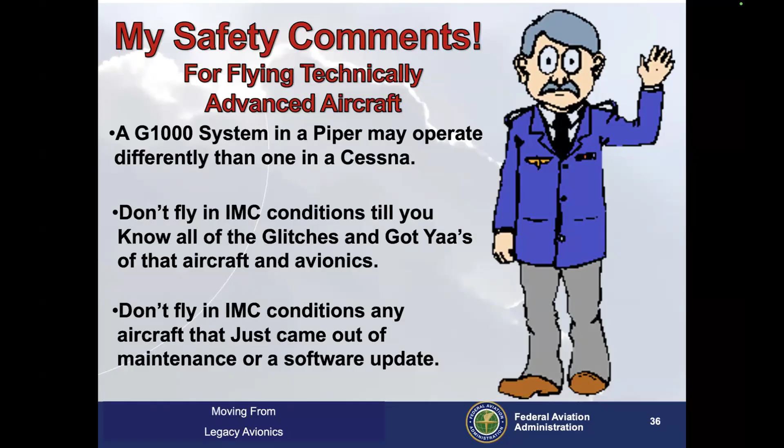And don't fly in IMC conditions anytime the aircraft has been in for maintenance or a software update. A software update can change the whole characteristics of a particular autopilot or the equipment that's in it.

What will tomorrow's avionics be? Well, it's hard to say, but I've been working on a couple of projects here where we can create holograms, maps, and also hooking up an AHRS to display a hologram of a screen. So a lot of new things in the works right here.